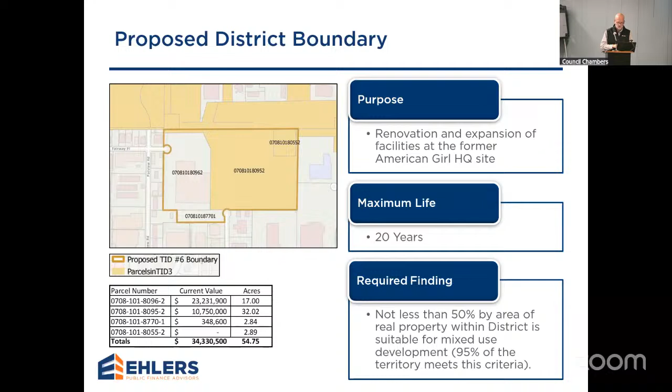This district, again, has a maximum life of 20 years.

Over time, this would create an additional 425 positions. There will also be economic benefit simply from the project itself, in terms of construction, orders for supplies, materials, services, and so forth.

Within a project plan, we have to identify costs the city may incur in implementing the plan. The principal expenditure in this project plan is the payment of a development incentive. The concept here is that without this type of incentive, the city does not reasonably expect that this major employer will continue to locate and expand here, and may potentially consider locations outside of the region and state.

So that $10 million is a placeholder at this point. Any incentive agreed to, the final amount and terms, would be subject to a development agreement entered into by the Common Council.

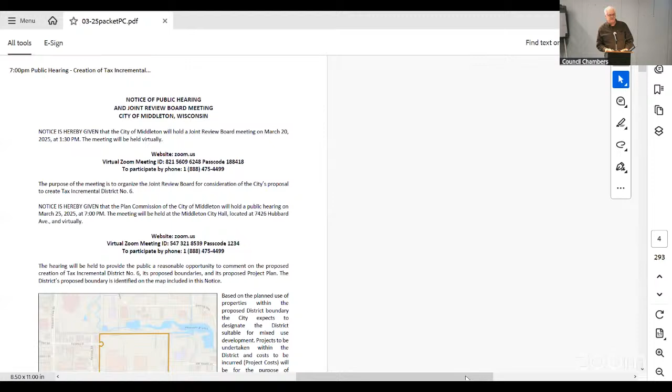I just wondered if we have any members of the public who have comments. Right now we have one person signed up to speak. David, are you going to speak? Need your name and address for the record? David, 1337 North High Point Road in Middleton.

I'm just here to speak in favor. I like the idea of trying to retain these jobs and improve the area that's outlined here. I think this is going to be a good thing for Middleton. The circumstances could be better, but this is doing the best that we can with what we're presented, so I suggest we move forward with it.

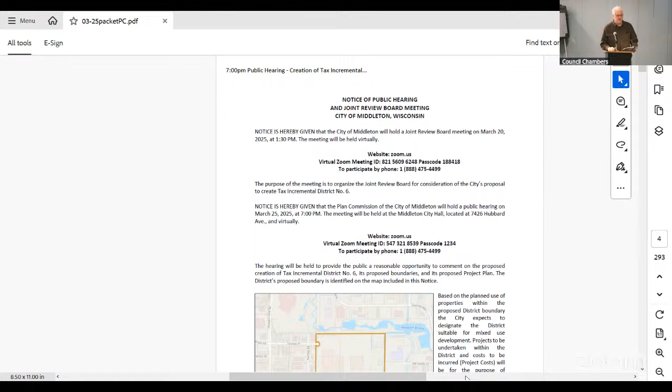Thank you. Thanks, David. Anybody else that would like to speak?

Mark, can you check the mic? Were you able to hear on the mic okay? I got a text from one of our commissioners that they couldn't hear during David's presentation, so we'll just do a mic swap. It's one every meeting.

Okay, since there's nobody else that wants to speak, I'm going to close the public hearing. And now we can look at questions for Todd.

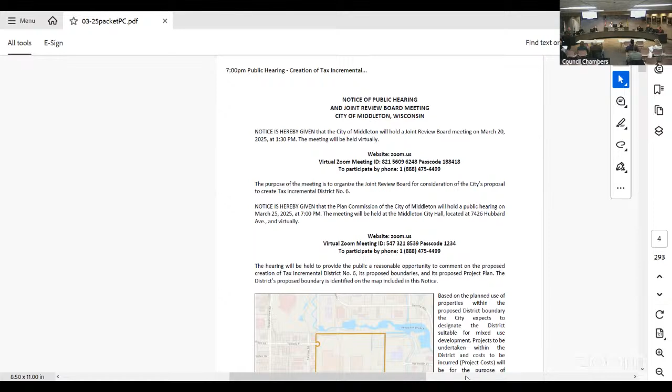Maybe we should hold that part as the agenda item, since it's just a hearing. Just a suggestion, going into the second hearing. Right, so he's suggesting we wait for agenda item number 1 and hold the other public hearing first. If everybody's okay with that, we'll go on to item 2 and circle back after this.

So item 2 is a 7 o'clock public hearing for revisions to the floodplain ordinance, that's chapter 24, BC 1089. I'm not aware of any comments provided.

He did, I heard him say that. Go ahead, Mark, I believe you closed the first hearing. I wrote it down, yeah.

This is a hearing pertaining to repealing and recreating chapter 24, the floodplain zoning ordinance. I'm not aware of any, I did not receive any written statements prior to the meeting.

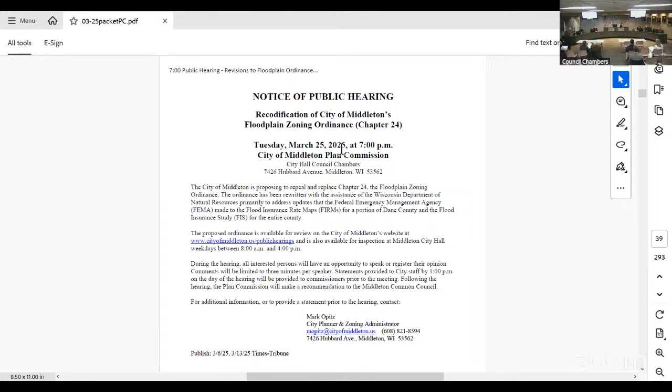So I will close the public hearing on the floodplain ordinance and go to the minutes of March 11th, 2025. Any changes, recommendations? Seeing none, I will declare the minutes approved.

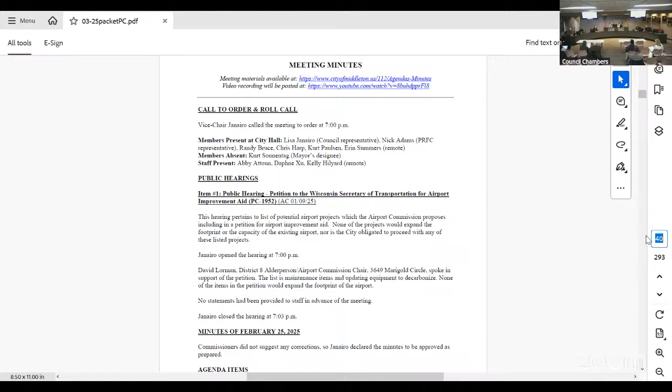So that gets us to agenda item 1, which is resolution 2025-17, consideration and possible action on the resolution establishing the boundaries of and approving the project plan for tax incremental district number 6.

The recommendation as it pertains to this is to discuss the comments from the public hearing and then consider recommending approval of the resolution. So are there questions for Todd from the commissioners?

Yes, Lisa. I have questions, but I guess I'll start by moving that we recommend that council approve the project plan and that council approve resolution 2025-17, establishing the boundaries of and approving the project plan for tax incremental district number 6. Is there a second?

100 Eagle Drive and adjacent parcels. Is there a second? Adams, a second. Moved and seconded. Now we can do discussion.

Lisa: I'm wondering, you explained, thank you for the presentation Todd, very helpful, and you explained the relationship between the timing of the legislation and council taking action. My question is, and maybe we can't get into this in public session...

Do we have a reasonable expectation that creating this TID is going to have the effect of retaining an employer? In other words, do we act before the employer signs a firm agreement with us? If we do and something falls through, what do we do with that TID?

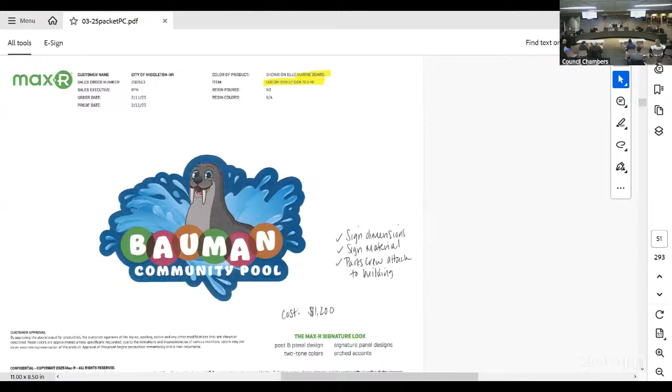Okay, agenda item 2 is the sign design review for the Bauman Community Pool. Recommendation is to approve the new sign and logo. Is anybody here to speak to that? No?

Well, if everybody saw the new logo with our friendly little walrus. I was simply going to add that there's been some questions about the origin of the concept of the walrus. The pool has long been named after Walter Bauman, and in the desire to rebrand it as the Bauman Community Pool, the idea was to keep Wally the walrus as a tribute to Walter Bauman, and his family is delighted with that.

I'm not sure that we've done any kind of logo approval in the past. We left that up to the applicant. I kind of was wondering that too, when I saw that, because I'm like, we approved the logo last week, and I was assuming this was just approving a new sign for the pool. I wonder if it just got copied over from the parks agenda and the language wasn't changed. That would explain it.

Okay, Nick, would you like to move? I will move approval of the sign for the Bauman Community Pool. Is there a second? I'll second that. Randy seconds. Any discussion? Hearing none, I'll call the question. All in favor? Aye. Aye. Motion carries.

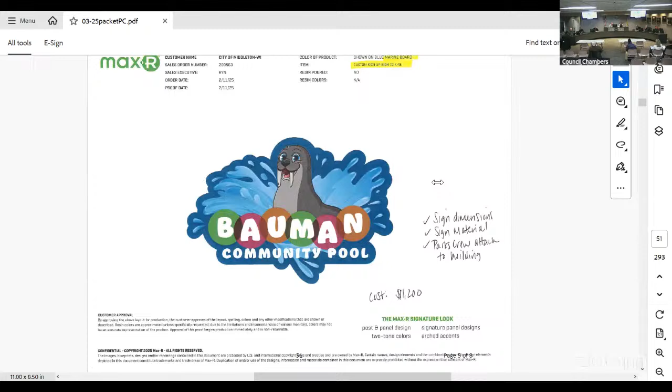Okay, item 3 is the site plan review for the Middleton High School baseball/softball field project north of 2100 Bristol Street. Hello, good evening. Lindsay Beeman with Point of Beginning, representing the school district. Okay, you're here to answer any questions? Yep. Okay, any questions that anybody might have?

All right, the recommendation from staff is site plan approval contingent on two items. Baseball/softball is on a former landfill and requires DNR approval of a materials management plan, and item 2 is the stormwater management plan review and approval.

Questions, Abby? I just had one thing to add that Lindsay and I have been emailing about, as well as with some school district representatives. One of the staff comments embedded previously on the plan set by our engineers calls attention to a storm sewer pipe that cuts on the diagonal beneath the ball field. That is a city facility, a corrugated metal pipe from 1968 that may be near the end of its service life. On the previous plans, we suggested it be rerouted around the baseball facility. However, in talking with our public works director, it sounds like that would be very expensive and very challenging, so I asked him about just reconstructing it in place so it doesn't fail 2 years after the new facility is built.

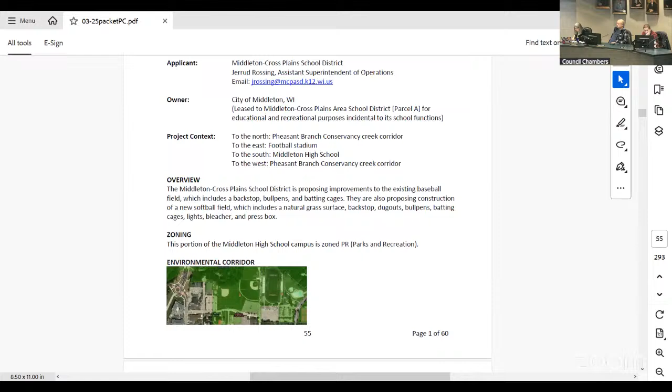All right, if there are no other questions, Lisa? I have a question on page 55, I think it's the staff memo. I was glad to see we won't need to remove any part of this site from the environmental corridor—it's unnecessary since sports fields are a compatible use within the environmental corridor and could remain mapped as such. I just want to make sure the district and your contractors know what's required when working within an environmental corridor, even a small amount, because there may be additional requirements that apply. I don't know that they will, but just to be aware of that.

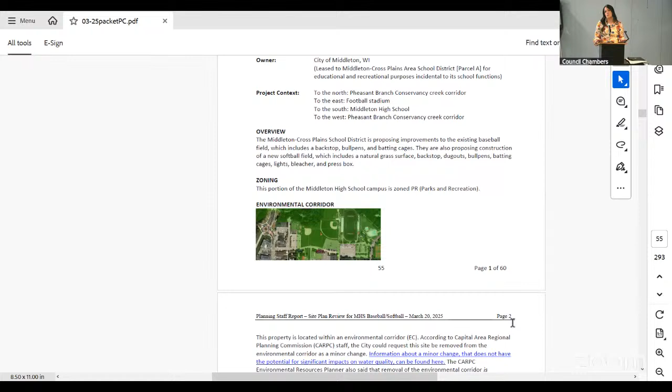And then how will the infrared heaters be powered? Those are actually being bid as an alternate, so I'm not sure if they'll be accepted or not, but we did have our electrical engineer routing electrical to those heaters and dugouts. It's still to be determined if they'll be approved. Are any of the games played during the day? That's a great question. I'd assume not—practice is probably held from 3 to 7 PM, and games are probably from 5 to 7 PM.

I'm just wondering about the potential for solar. I was very disappointed when the new entrance to the stadium went in—it was oriented exactly the opposite of what you'd want for solar to be possible. And now solar and batteries are less expensive, so who knows what will happen, but just something to think about since I know the school district also has a renewable energy goal. Sure. Okay, any other discussion?

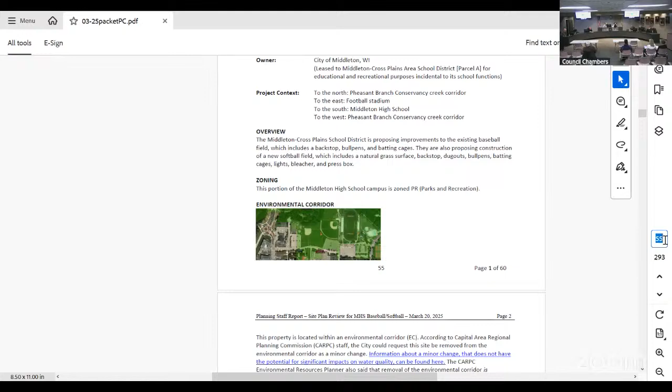Is there a motion? I think we have... did we get one? I guess we didn't, no we didn't. I don't think we jumped the gun.

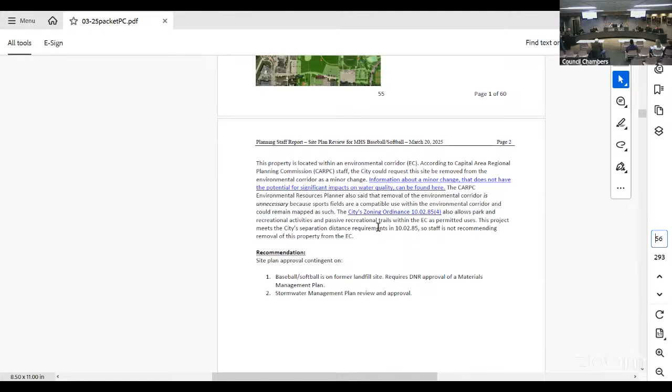Is there a second? Adams will second. Okay, there's a motion and a second. Hearing no other discussion, all in favor? Aye. Aye. Opposed? Motion carries. Thank you.

Okay, item 4 is the site implementation plan SIP amendment for Middleton Shores redevelopment.

We do have a couple people here who are available to answer questions. Did you want to make any remarks too? If that's okay with you, Mr. Chair? That's fine.

Hi, Kathleen Laird with Korb Architecture. I'm just here to answer any questions. I think Mark did a great write-up on some of the changes we've made since we were here last, and some of the exploratory things we did with the site. The change being that we could go down a level with more geotechnical information, and that really was the start of us re-examining the design from the last time you saw it. So any clarifications you'd like, I'm happy to answer.

Yeah, I've got a question for you. When this was originally went through the review, the thought was that underground parking wasn't available for the site. Correct? And I know the commission had questioned whether the building could just be pushed down and reduced in height. Why was that not the solution taken once you saw that underground parking was available? Why not just lower the building down in height?

Sure, that's a perfectly good question. With the amount of geotechnical information we had at the time, we felt that was the responsible design response. We were balancing that with the owner's risk threshold for where that water table is. For various reasons we needed to seek out more geotechnical information since we saw this committee last, and that started to point us to this being more of an option we could entertain. We continued down that road, also knowing that was something you wanted to see as well, so it worked out well with some of the client's goals, and I think they became more comfortable with the idea of getting closer to the water table.

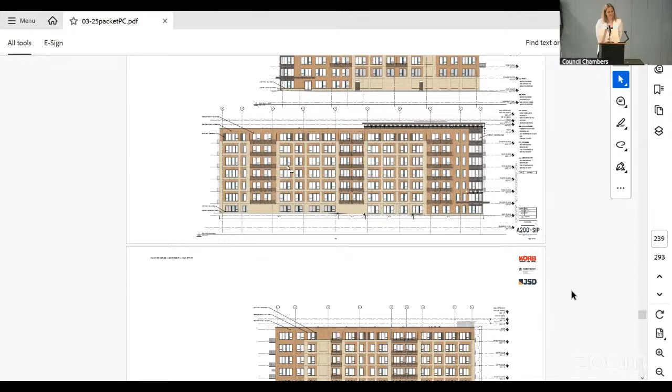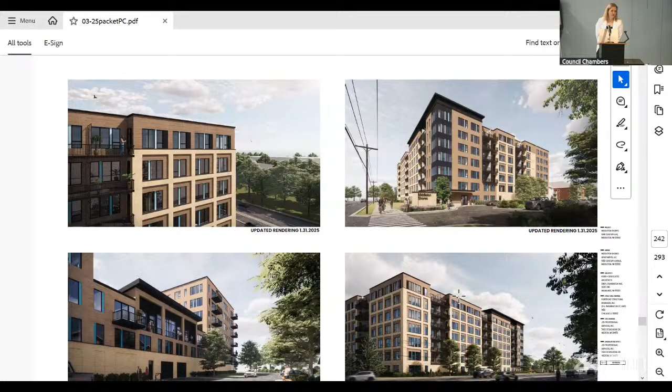And I guess, I appreciate that because I think it's a better solution. But instead of taking the old design and just pushing it down a floor, you've actually left the height where it is and recouped additional space on the second level that was parking for additional housing. Why was that the solution implemented? To better balance the project, it made sense to add more density. This site is great for adding density because it's so well connected to public transportation and other amenities. So it seemed to make sense that we had this opportunity, and we could also in turn line that second floor, which we knew the city would prefer to see as well. So it started to work hand in hand fairly well.

Any other questions? I have no more. Okay, anybody else? I had a couple of questions.

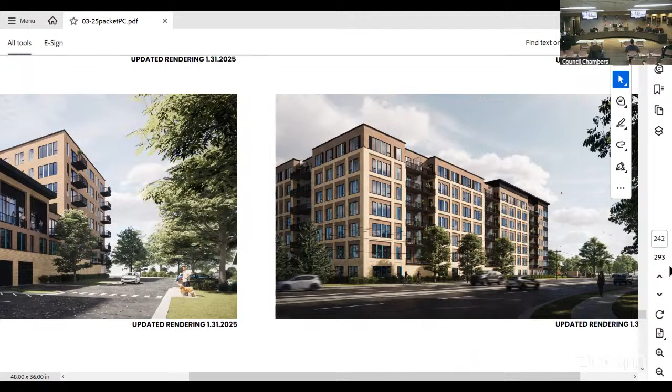Why aren't the utilities being undergrounded as part of this construction project? There's no mark in your memo about appreciating that the images include the above ground utilities. Yeah, those are public utilities along the street, they're not on private property. That comment actually is from my report from last year, I just kept it in there.

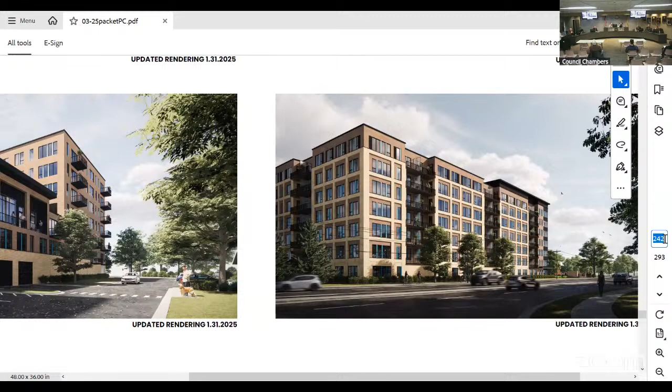Okay, but with all the work going on in that area, the intersection, isn't this part of one of the city's goals, to try to get everything undergrounded? Yeah, I mean the type of utilities hanging overhead there are so significant. I can't speak to what all they are, but it's a very heavy duty corridor of utilities, and I'm sure it would be hundreds of thousands of dollars to bury them for just a block, or a block or two.

I don't know what the cost is, but that was not something we expected of them, especially since this is not in a TIF district, and it's not on their property. I just wanted to point out, you can see them very faintly here in this drawing, but it's nice to have a design that shows what the reality is instead of just hiding it.

Not every designer does that. There's another rendering that shows them even more. Last time we were here, there was some question about the landscape design, and the response was that we had to respond to those power lines being there.

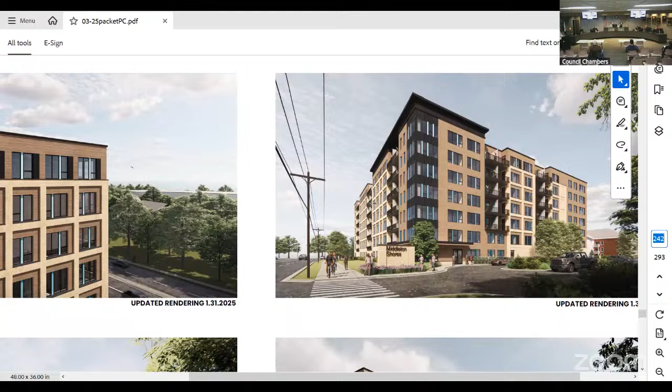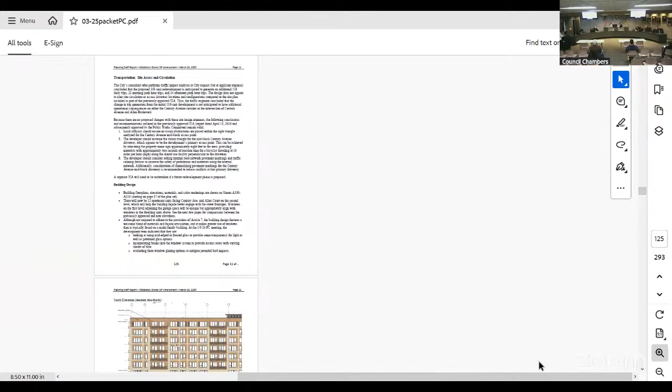On page 125 of the packet, it talks about the TIA, and it says the proposed 161 unit redevelopment is anticipated to generate an additional 518 daily trips, 22 morning peak hour trips, and 24 afternoon peak hour trips. It seemed odd to me that there would only be 22 peak hour trips in the morning and 24 in the afternoon. That doesn't seem like a lot of people in a 161 unit building.

Could that be- our city traffic consultant, SRF, reviewed this a couple months ago, and this was reviewed with their city engineering staff. I can't speak to the details, I don't know if you have any insights. We didn't generate the report, so I don't want to guess.

This went through the Public Works Committee? I don't know if the revised findings went through there, but the original TIA went through there in April of last year, as a contingency of approval. Then, working with the city engineer, we asked SRF to look at the increased number of units and determine whether that required a change to the TIA. That's what I'm reporting here in the staff report.

This is still not a good fit for the MRH zoning district, is that correct? Not the MRH, because the MRH is limited to a height of 5 stories, and this is a 7-story building. 5 stories with the additional possibility of a bonus. Well, that's true, thank you.

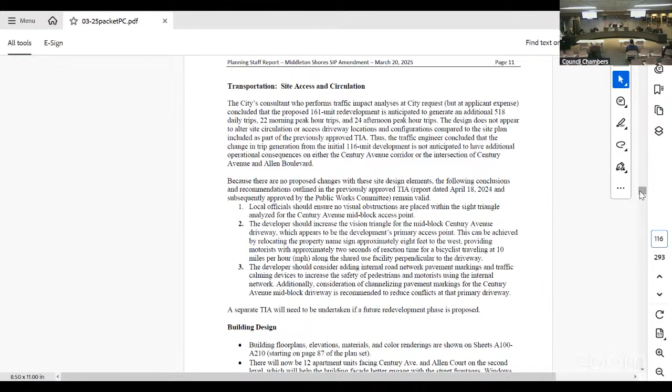They don't turn them over, so they're very interested in keeping it energy efficient as well. Mark, you mentioned this is working within the framework of the previous zoning code. What about EV charging capabilities in the parking areas?

That was anticipated when this was previously approved, before we adopted our new zoning ordinance. I did not review this against the new zoning ordinance requirements or every aspect of it, because I recognized they had their entitlement for the previous project. However, I did call out the bicycle parking as a concern, which is why that's included in the staff comments.

Why didn't you call out EV charging? I could have, I guess. I didn't feel that was necessary, but that's certainly your prerogative to discuss that with them.

Would you be at all willing to incorporate some EV charging stations? That has been a conversation, even as part of the last process, that we were looking into. Speaking as an architect, not as owner, for a minute - we're counseling our owners to keep an eye on it because insurance companies are responding very differently depending on where those are located, exterior of the building versus interior. We're seeing some shifts there, and ownership is very interested in that.

We had told them, let's keep that in mind, let's aim for that because they know their residents are going to want it. But we want to see how this plays out so the building can be insured as well. So whether they're inside or outside the building is kind of up for debate. Now that we've engaged the engineers, we're very curious, from an infrastructure standpoint, how many can we plan for, how many do we do on day one, and how many can we plan for the future?

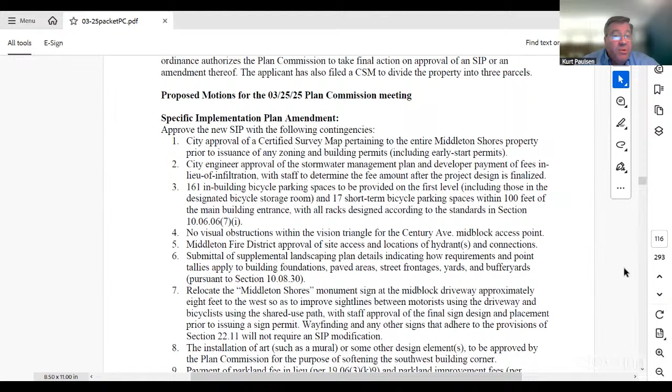And so this SIP contingency would be 161, which is one bike space per unit, right? Yeah, and our new zoning ordinance would actually require 211, I think off the top of my head, because it would require for a 2-bedroom unit an additional half parking space.

So based on, I think it was 91 2-bedroom units and 71 one-bedroom, is that right? Yeah, I think your original email had said 207. So the formula would require 207. What they got authorized for under the previous SIP was for 84. They obviously had a previous design they were working with. The new design did not increase the bicycle parking, which is what caused my concern. And I'm sure they're not completely happy with this requirement.

I could go to the drawing showing you where it is if you want. It's on page... yeah, I saw it. Well, I was just going to show it since we're talking about it. Oh yeah, show it.

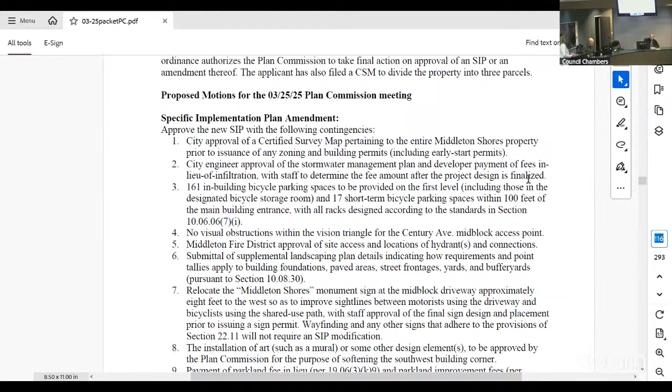But normally we review bicycle parking numbers at site design, or is that a zoning issue? Well, this is through the SIP process. Yes, this is essentially site plan review. So I felt it was appropriate to flag it.

So as I understand it, it's the space, right, Kathleen? Correct, it's an enclosed space, probably very similar to the previous floor plan. I didn't actually look at the previous floor plan. I was focusing on the exterior of the building and the improvements Commissioner Bruce noted with the second story appearance, with the residential units facing Century and Allen Court, which I thought was a great improvement. Here's the second story floor plan, which shows those units now, the 12 facing those two public streets. So that is a significant improvement.

The bicycle parking is tucked away here. It's hard to expand this space because that's where they have accessible parking, so there'd have to be some modifications. What I've suggested is, and I haven't necessarily prescribed a specific way to address it, but there are other ways to provide it. It's not uncommon for a building of this sort to provide bicycle parking just out in the open as well, so there's potential to convert some of these spaces. They are definitely about 50% above our minimum parking requirement.

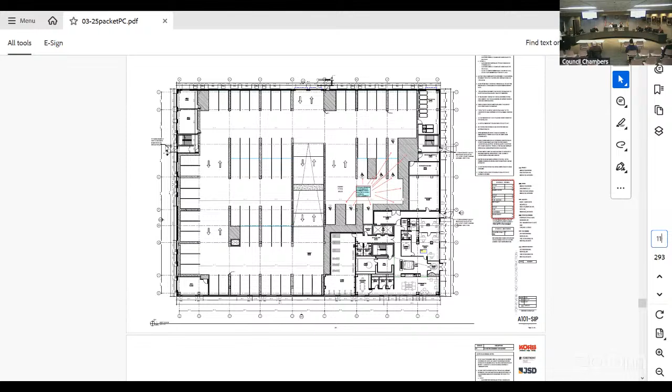I appreciate your working with the staff on the solution. I do think, Mark, that the design solution is better and it's an improvement over what the original SIP was, and I do appreciate that. Honestly, I'm uncomfortable with the increase in density and parking and calling this a SIP modification.

So we called it a SIP amendment. I feel that really would be more appropriately a GDP, new GDP or GDP amendment. But that's not my call, that's yours. But for that reason, and the fact that the height is still above what we would allow otherwise without appropriate bonus heights, I'm gonna vote against the measure. But I do appreciate your efforts and I do think it's a better design solution, so thank you.

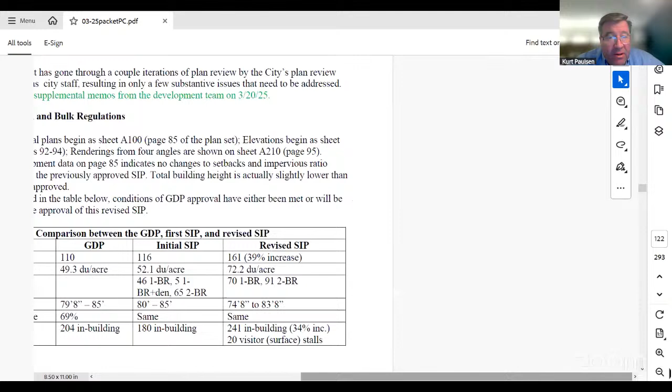Yes, Kurt? Well, I was gonna follow up on Randy's comment about the difference between GDP and SIP. Does the GDP actually specify a number of units? It did not. Well, actually it did here, didn't it?

The public hearing, when we rezoned to GDP, did not specify a number of units, I don't believe. I can check that quickly. No, I think that's right. Well, I want to be able to answer that definitively.

So one of the issues with the GDP is you have to determine whether the SIP is reasonably consistent with the GDP. And at the time, a year ago, we decided that 116 was reasonably consistent. The density was reasonably consistent. The height was reasonably consistent. Impervious surface area stayed the same at 69%. Parking spaces went down a little bit. And so a year ago, we determined it was consistent.

So the question that I looked at when this application came in is whether this increase, the 39% increase, which is obviously not an insignificant increase on the face of it, is reasonably consistent with the previously approved SIP, which we found was consistent with the GDP. And that's where I turned to things like the traffic study, which said it was a negligible increase.

I looked at the height of the building, which wasn't changing. I looked at the footprint, which wasn't changing. The setbacks weren't changing, and we were getting a better design. And so for those reasons, I decided as the zoning administrator that it was reasonably consistent, but it required an amendment of the SIP since there were changes. That's how I reached my decision.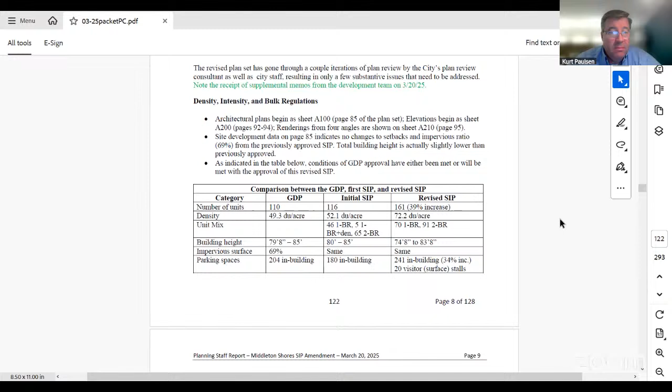Okay. So the height is not changed from either the GDP or the first SIP. It actually, from what I could tell, has gone down a foot at most. Yeah, we changed construction types, which resulted in a small decrease in the height.

I'm going to echo something Commissioner Bruce said with regards to height. I was not on the planning commission when this project first came in front of this body, but I did pay attention to this pretty closely. I don't feel comfortable - I know this was approved before our current zoning map, but when we approved the maps, we approved them in such a way that this building would not be allowed if it were to be first presented to us now. Right? Because nothing inside the Beltline would really allow this height under the current maps.

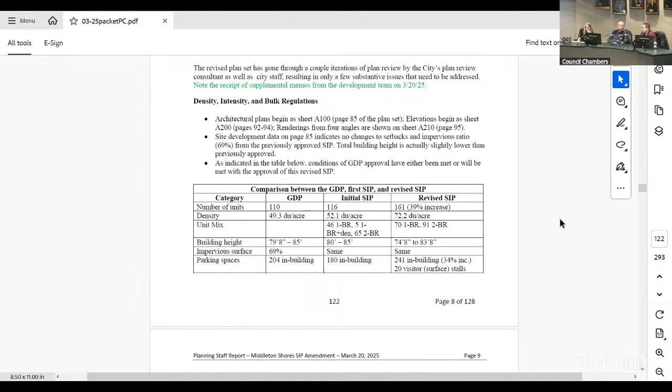Am I correct? When you say our current maps, you mean the zoning map? Yes. The standardized zoning map, the maximum height is a 5-story building east of Parmenter Street. So west of Parmenter, which is inside the Beltline, is allowed up to 10 stories. This site is zoned PUD, and they had to get a conditional use permit to exceed the height.

So our comprehensive plan actually contemplated the possibility of a higher building, but there's language in the comprehensive plan that said it would require a conditional use permit. They applied for and received the conditional use permit. So the zoning is in place, and if the effect of voting against this amendment tonight would be to say you're stuck building the previous project. Yeah.

I had a similar question - if you're able to go down, why not just have the building a little bit lower to be more in tune with what's in the heart of the city of Middleton, especially that area. Across the street it's a 3 or 4 story building at Harbor. I know Lake 61 is 4 or 5 stories, but where that's located is so far down a hill it doesn't protrude up very much, whereas this is going to be almost like a centerpiece as you're coming up Allen Boulevard. I was uncomfortable with how this is going to fit into that neighborhood, that area of the city. Still kind of uncomfortable, but I understand the quandary we're in.

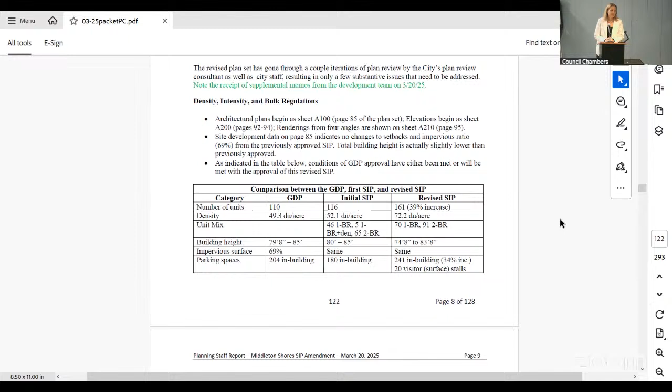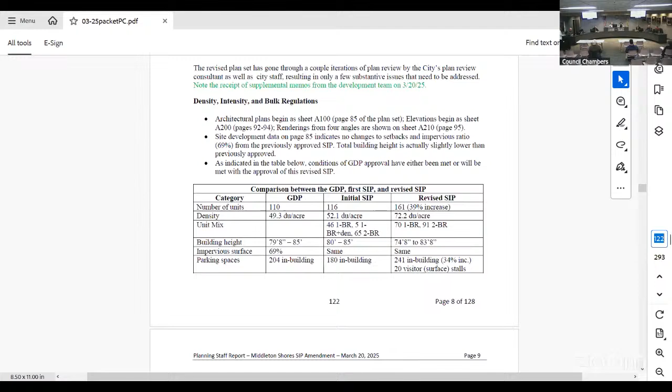Well, I'm going to vote for this change. I appreciate Commissioner Paulsen and Commissioner Bruce giving us a reason to walk through the GDP and SIP comparison in the process. I chair the Workforce Housing Committee, so I'm delighted that we have an opportunity to keep the building the same height above ground and add additional housing. I think that is a wonderful development.

I'm actually very thrilled to see development going up, not on farmland, in my own district. So my district is really going above and beyond for the city, and I appreciate that your building will do the same. I think there's maybe nothing wrong with it being, did you call it a centerpiece? As you're coming down Allen Boulevard, I think that would be striking.

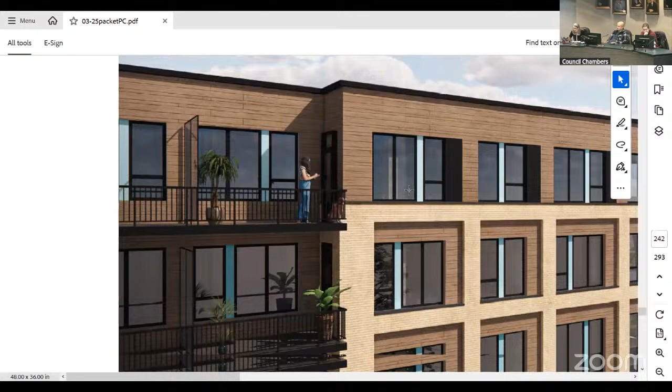I did have a question about contingency number 8 regarding the installation of art to soften the southwest building corner. Can we go to the new rendering for that? I'm wondering if that is still needed. Do you have a page for that? I think it's page 242 of the packet. That corner right now is comprised of glass and will remain as such.

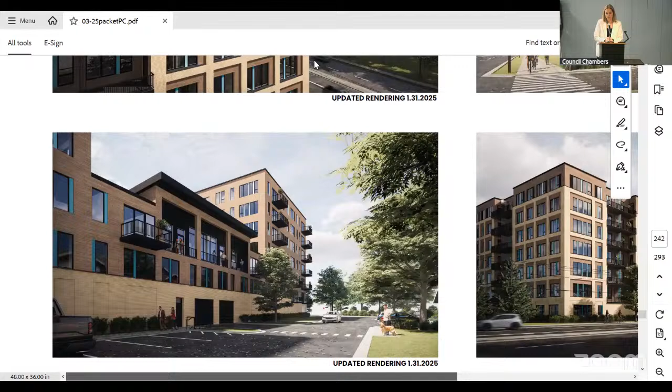One thing we realized after the initial SIP is that we have our stormwater swale going through that area. So we were mindful that if we continued looking at art installation options, it would need to be something that could be viewed from afar, not up close, because of the way the site design developed. Is this the corner you're talking about? Focus, yeah, correct.

At the time, also, that was when we had 2 stories of parking. So now, since the second floor is occupied space with residential units, I agree there's less of a need for it because we're bringing life all the way down to that second story. But I will defer to this committee. Abby, you and Commissioner Summers are the art people - do you remember, was the intent to do it on the corner or right where those bicycles are, the people on bikes? It just seems like maybe the need for art is not there anymore.

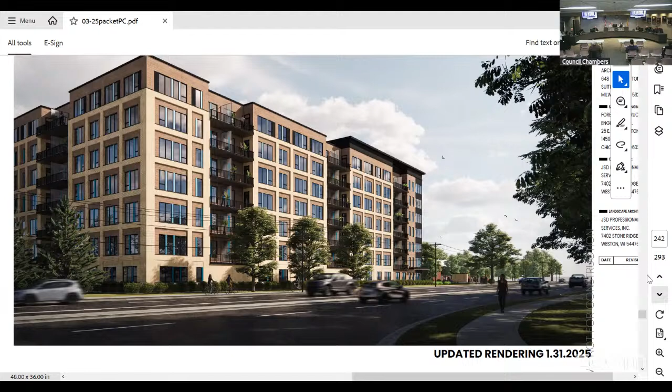I think that pertained to the old design - is that right, Mark? That the artwork was only going to be required if that section was parking at grade and not windows, in order to create visual interest at the pedestrian scale. I just want to see... Oh, we still, yeah, so what I did is I just kept the same language that was in the previous approval. So that remains a requirement unless you remove it.

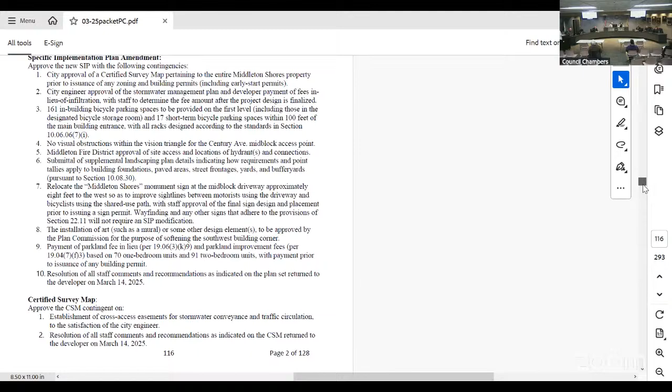I agree that they've improved the design of the building at the second story. I do have the renderings in the packet where I compared - sorry, I'm not as good at this as Daphne is.

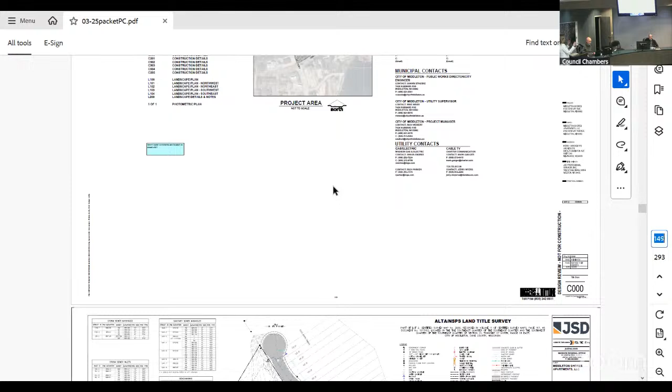We do have balconies now at that second level on both facades that comprise that corner. So that gets us a little closer.

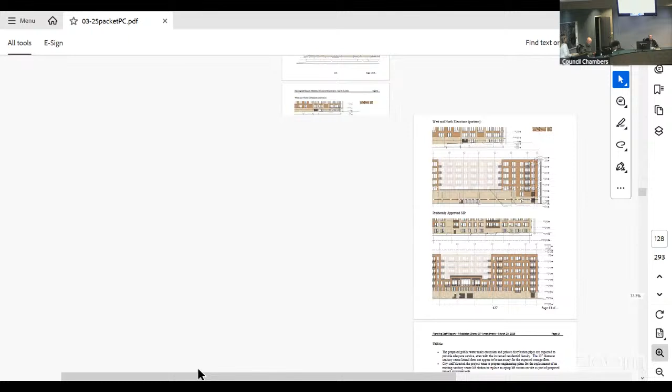What I tried to do, since I figured this would come up, is put in a before and after comparison from a year ago to this iteration, because I figured this would be meaningful. So this is that southwest corner.

So this is the previously approved SIP, and technically this was going to have parking up here, even though they were using larger windows, but they were probably going to cover them and be opaque, I would guess. They would be acid etched.

It's just a frosted look, that's just the technical term for like a frosted glass.

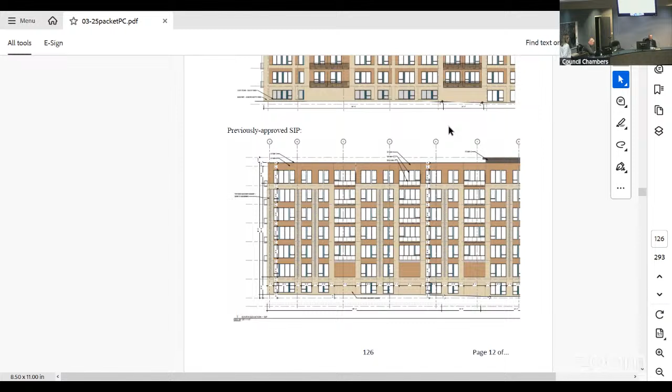I'm not seeing a need for art here. I wonder if this is something, Abby, do you envision this as maybe the city paying for the art as part of our 0.5% for the arts, and just getting the developer to agree to house it? I did not put that recommendation together, and so I wouldn't want to presuppose that the Arts Committee would want to use their funding for public art on a private building.

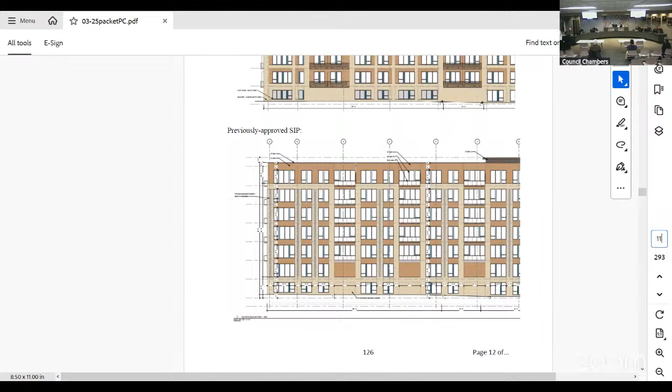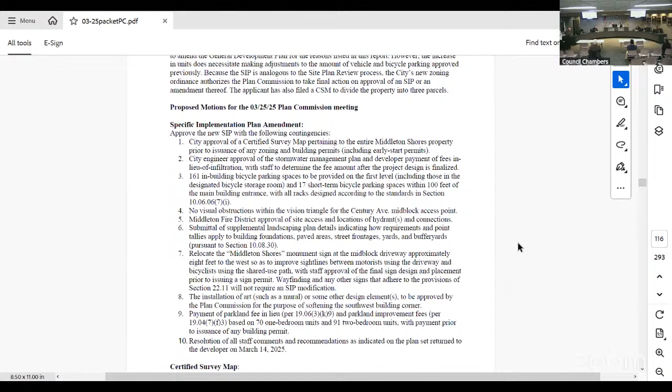Well, we don't have this at the Trotta or at the Kestrel or any of the apartments going up in my district. So I'm going to move to amend—actually, we don't have a motion yet.

That makes it easy. So I'm going to move that we approve the amendment to the SIP with the following contingencies, the ones showing on the screen, minus number 8, which will be renumbered, so 9 will become 8, and 10 will become 9.

That's my motion, this is Paulson. I'll second that motion. Okay, Kurt, you second? Any other discussion? Hearing none, I'll call the question. All in favor? Aye. Opposed? Motion carries.

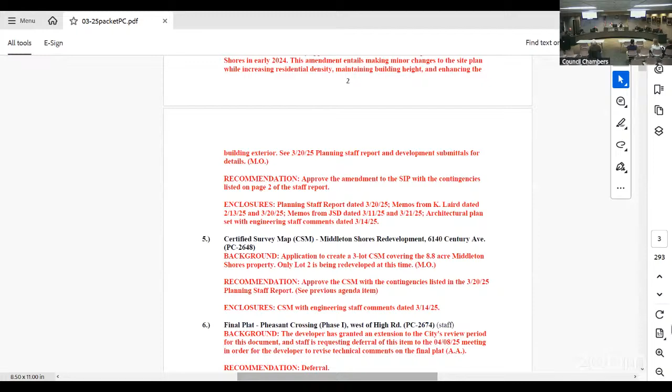That takes us to item 6, the final plat for Pheasant Crossing Phase 1, off of High Road. I'm sorry, I think we're on item 5, Mr. Chair, the certified survey map. Well, what did we just approve? I thought that was the item. Same project, same development, now it's the CSM. Oh, this is at the bottom of the screen. Gotcha.

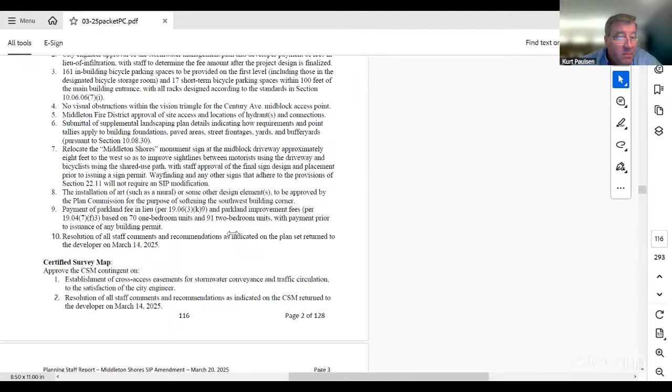I'll move approval of the certified survey map for Middleton Shores redevelopment, 6140 Century Avenue, with the two contingencies showing on the screen. Is there a second? I'll second that. Any other discussion?

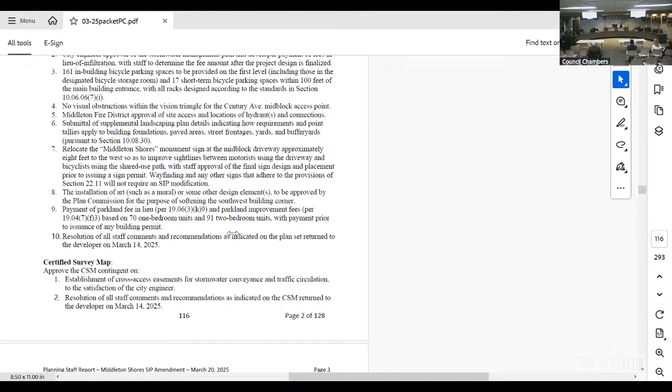Yes, so what is the status of Outlot 1? Will that be dedicated to the public? We would like it to be, but no, Outlot 1 is not dedicated to the public. That's Anna Case. Oh, Anna, you're there now. Good, yes, okay.

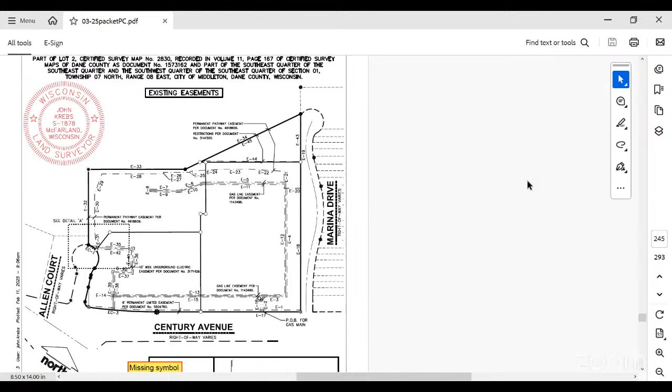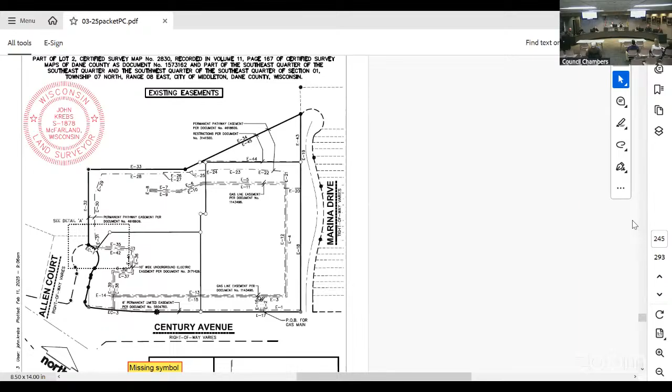And can someone explain the word 'lands' on lot 1 and outlot 1? There's the word lands, underlined, and I don't know what that means. I'm looking at page 243, two pages up. Okay, so you see where it says, I just see the word lands three times actually, on outlot 1, lot 1, and lot 2. It's just this word, right here, lands.

I see, now that I know what you're talking about, what is the question again? Sorry, what does that mean? That is land. I thought it was only on lot 1 and outlot 1, I thought it was maybe conservancy lands above that line or something. So can anyone explain what that is? It's also on number 3 here. Oh, it is on number 3. Yeah, it's on all of them.

Do not make a Land's End joke, please. I haven't made any jokes.

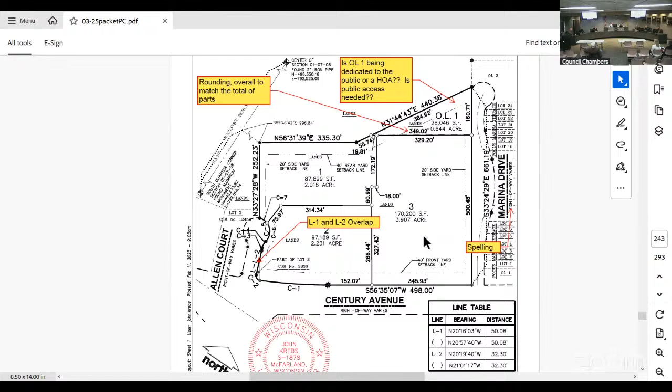My name's Alex Mayo, I'm with JSD Professional Services, project engineer. I can just speak from my limited survey background here that the 'lands' notation is just indicating that it's not currently platted lands, that these were done via the CSM, so they're not part of a larger subdivision at any point. Okay, thank you.

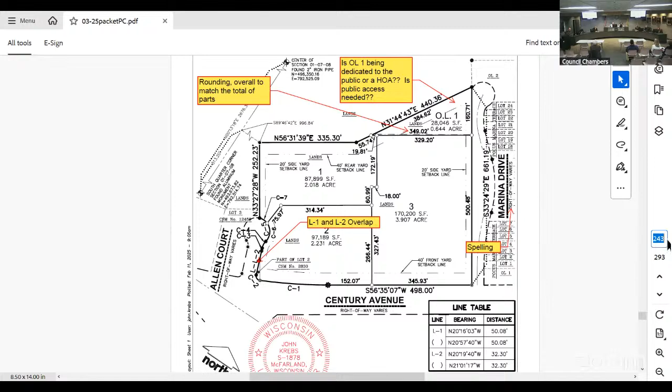So that's the motion you have before you.

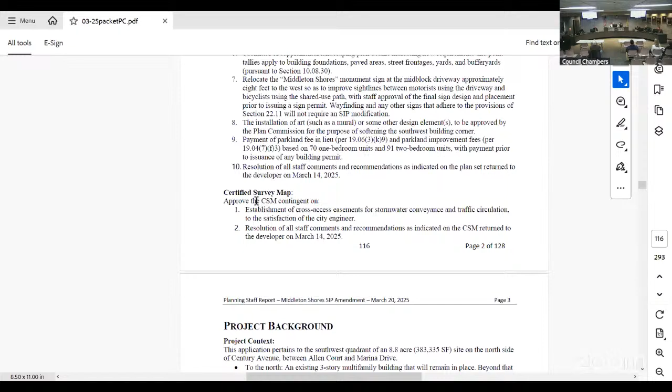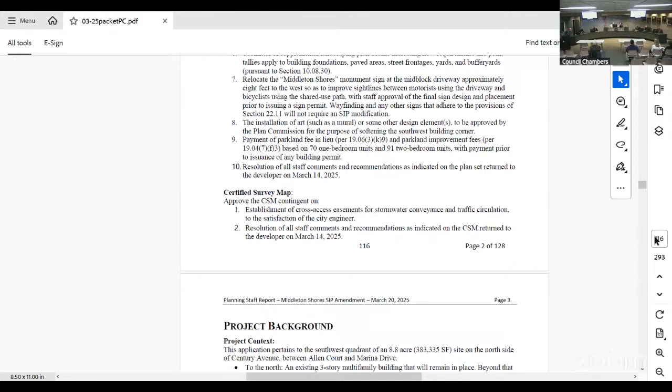Comments? I think you have a question. All right, no other comments? Call the question. All in favor? Aye. Opposed? Motion carries.

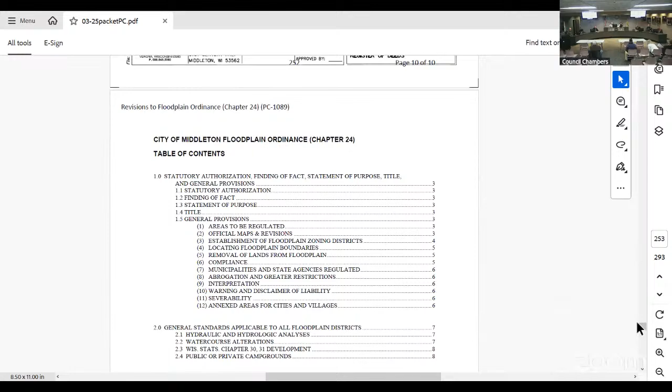Okay, item 6 is the final plat for Pheasant Crossing Phase 1, west of High Road. Recommendation is deferral, pretty easy one. Do we need a motion for that? Yeah, we do. It's on the agenda, so yeah.

I move to defer consideration of the final plat for Pheasant Crossing Phase 1 west of High Road until April. Is there a second?

Adam seconds. Any discussion? So it's until the April 8th meeting? April, just in case. I mean, I know you're planning on April 8th, and that's good, but if we get another extension, this will be good for April.

Any discussion? Seeing none, I'll call the question. All in favor? Aye. Aye. Motion carries. Thank you, and that gets us to the end of April essentially, is what you're saying.

I'm just saying we'll consider it in April. Okay, we can pick which meeting. Okay.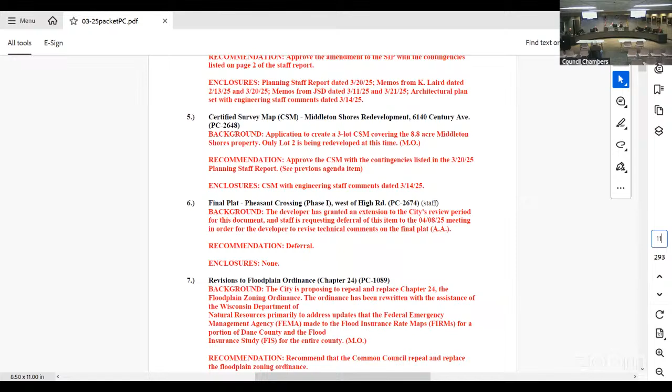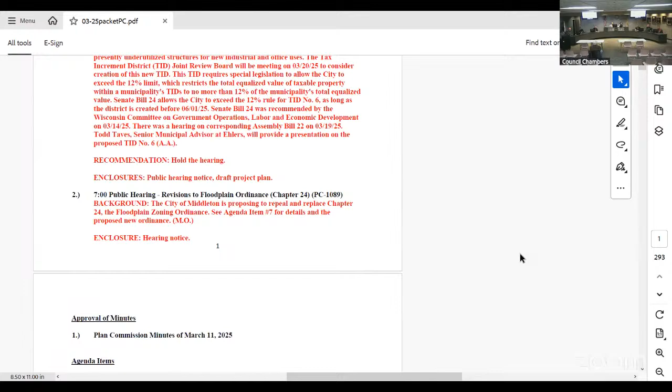Okay, item 7 is the revision to the floodplain ordinance, Chapter 24. This is Haniro. As a member of the Water Resources Management Commission, I move that we recommend to the Common Council the repeal of Chapter 24 of our municipal code, our floodplain ordinance, and replacement with the version approved by the WRMC.

Okay, it's probably the same version that we... the reason I'm hemming and hawing is because we worked until a week and a half ago with the DNR on tweaking a couple little things in response to our city attorney's comments. I don't recall if WRMC's packet had the absolute latest version of it. So that's why — but this packet does.

So that's the only reason why I'm cautioning that it might be better to not mention that WRMC's guidance is reflected in this ordinance, but there might be a word change or two here or there that is different. I just can't — I just don't remember off the top of my head. I had so many versions of this thing.

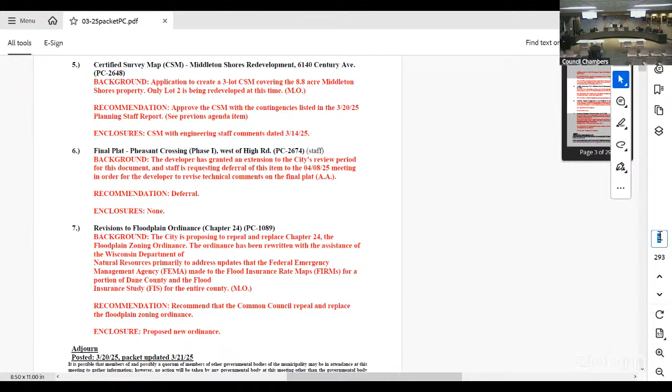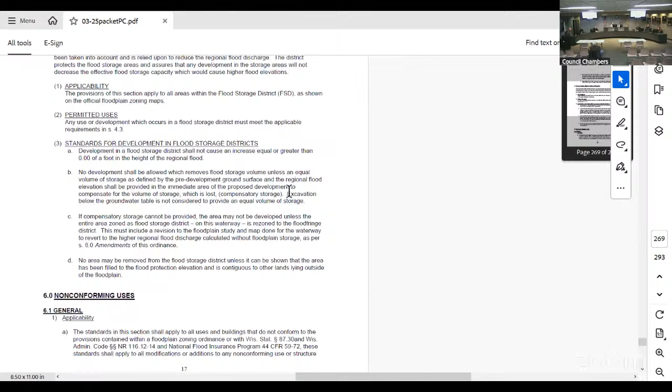Well, Mr. Chair, without objection, I'd like to amend my motion to end with 'replacement with the version in the Plan Commission packet.' I appreciate that. Thank you. Okay, and you accept that? I'll accept that. Okay, any other discussion?

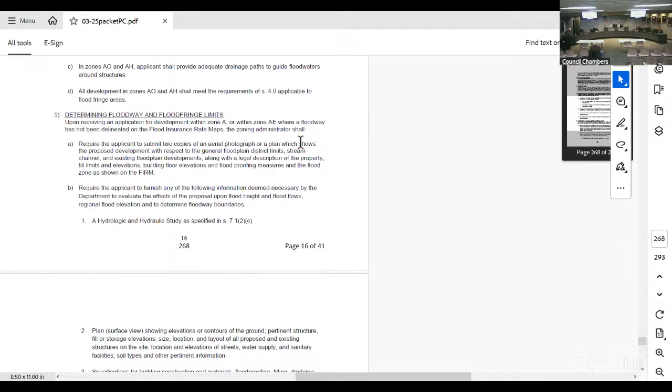Please — I think what it is, Lisa, and I'm happy to share it with you. It's fine, I just don't — since the language is now reinserted, I'm just looking for where it is. It's 3 point...

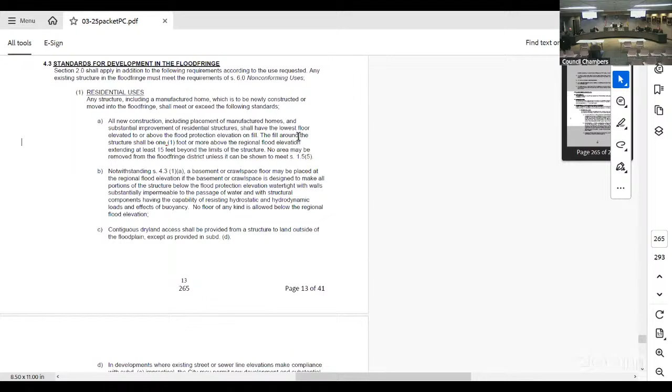Just want to make sure it's under prohibited uses. We had to add 3.4 number 3 back into the ordinance. I don't recall if that language, that was something the DNR requested, and I don't recall if that language was stricken in the water resources language. It just — it's meanings. I just wanted to make it clear to my colleagues on the Plan Commission that WRMC has looked this over, and thank you.

Given it a thumbs up, because I don't think that was mentioned in the packet. Probably not, sorry about that. Okay.

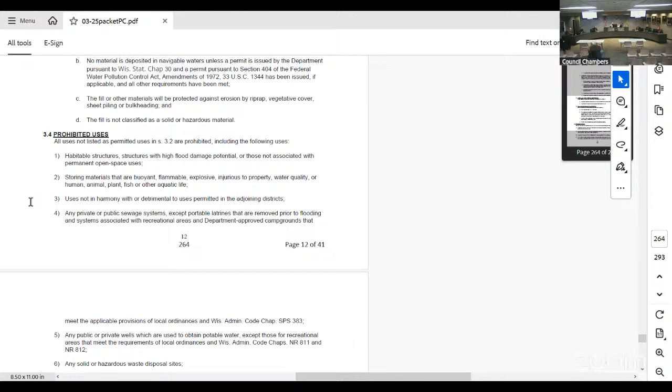It's been moved and seconded. All in favor? Aye. Aye. Motion carries. Thank you, one and all.